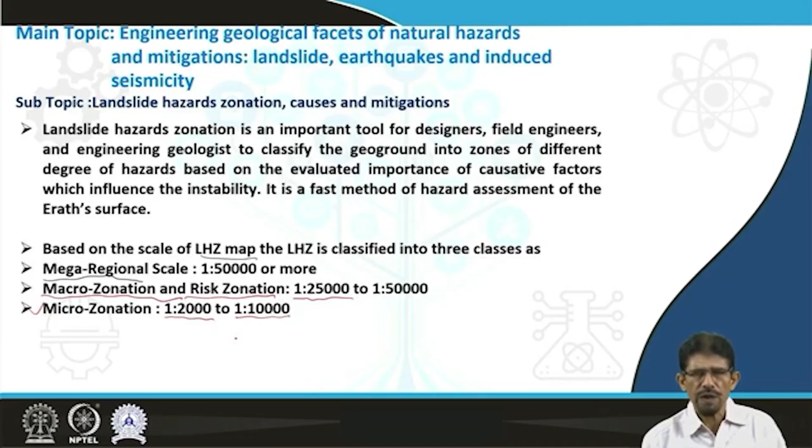The factors which influence formulation of landslide zonation are important, as these factors govern the phenomenon of landslide. The factors important for such formulation are lithology and structure. Structure deals with the relationship of the structural discontinuities with the slope face. Then slope morphometry and relative relief. The relative relief explains the height of slope. Then land use and land cover, and then groundwater condition.

If we look at each parameter, we can say that lithology consists of rock and land types made up of soil, debris and others. Overall, this lithology represents, in our discussion, the geoground. The geoground comprises a variety of materials, some intact, some in the form of rock mass, some weathered, some fully converted into soil. Considering lithology, we look at the overall distribution of lithology throughout a particular area. Suppose this is the area, then we map this area in view of the distribution of different lithologies.

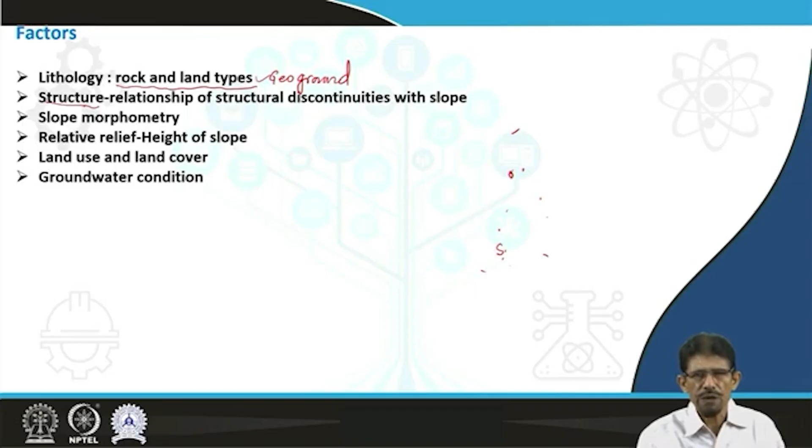Then about the structural or structure. Structure is about all kinds of discontinuities including fold, fault, foliation, lineation, schistosity, bedding planes, cracks, fractures, etc. How the cracks, fractures and others in form of structural discontinuity develop some relationship with slope, or what is the connection with the face of slope.

Suppose this is the face of slope, and suppose we are going to see about the distribution of the beddings, then what is the relation? We can define the relation with help of the angle of these beddings. The dip of these beddings is toward the downward slope side, where this face is having a particular phi 1 angle, where this bedding with respect to face is showing theta 1 angle, almost same, theta 1 dash angle, theta 1 double dash, theta 1 triple dash, where theta 1 dash, theta 1 double dash, triple dash are almost same.

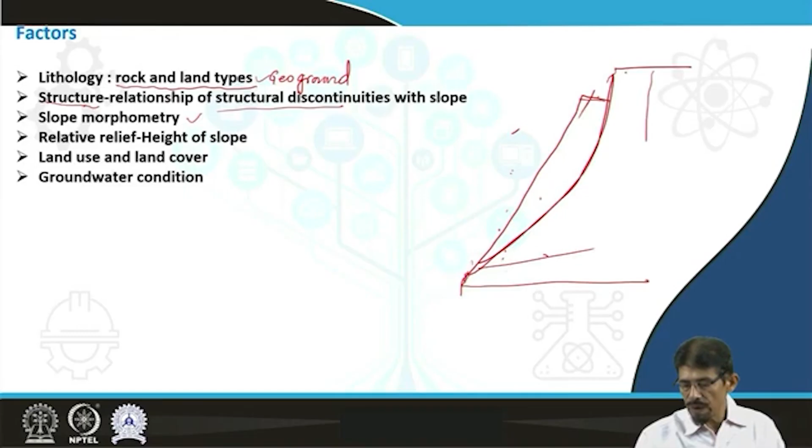In this way we are going to see about the role of structural discontinuity in triggering the landslide process or phenomena. Another important aspect is the slope morphometry. The slope morphometry is dealing with the features available in this slope, along with width, different cuts, the depression caused by some previously developed slides, the zonation related to loose material, solid materials and others, and the drainage system present or draining the slope, etc.

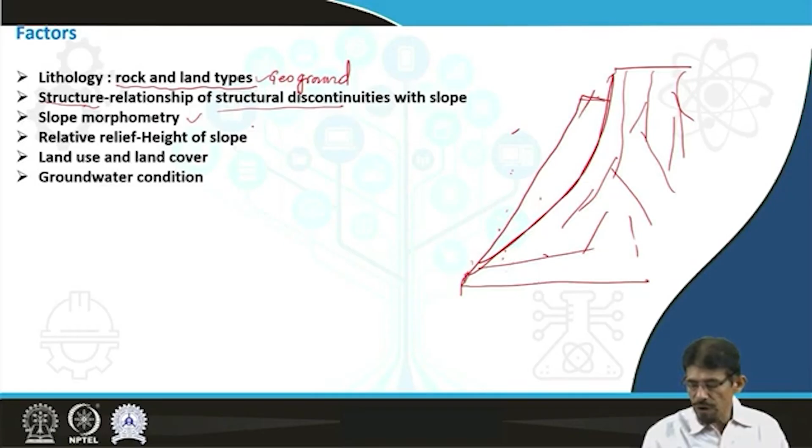Then we are going to see about the height of slope. The height of slope, this is the angle of slope. About the width of slope, we are going to measure in slope morphometry. Then particularly the height of slope we are going to define under the heading relative relief. This relative relief we can define by topographical view in terms of elevations with help of different contours and others, as well as physical measurement.

Land use and land cover indicates the parameter concerned to distribution of different landforms in the area of study, belonging to some river form, some weathered material, some aeolian form, some glacier form, etc. And then the part of the area covered under the forest, part of area covered under the vegetation, part of area under the shrub distributions and others, and some of the area is barren land.

So in this way we are going to assess the part of the area covered under forest, part covered under grasses, part under agricultural land, part barren, and part under residential zones. Such type of division is going to produce the features of the area in view of land use and land cover, because the forest, different types of plants, and different types of grasses are going to influence landslide occurrences.

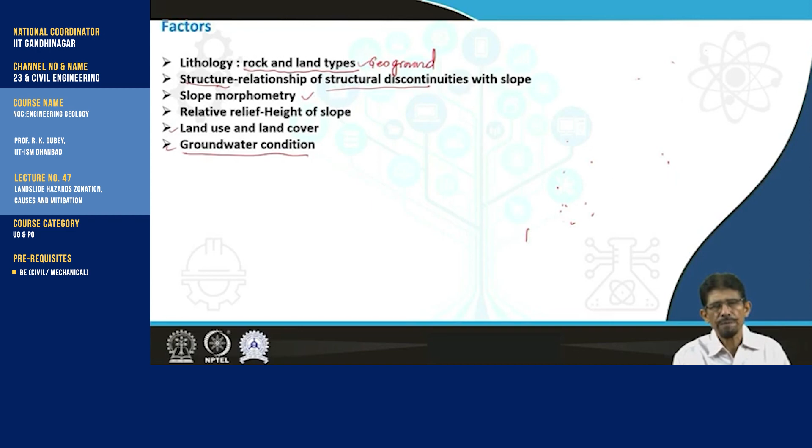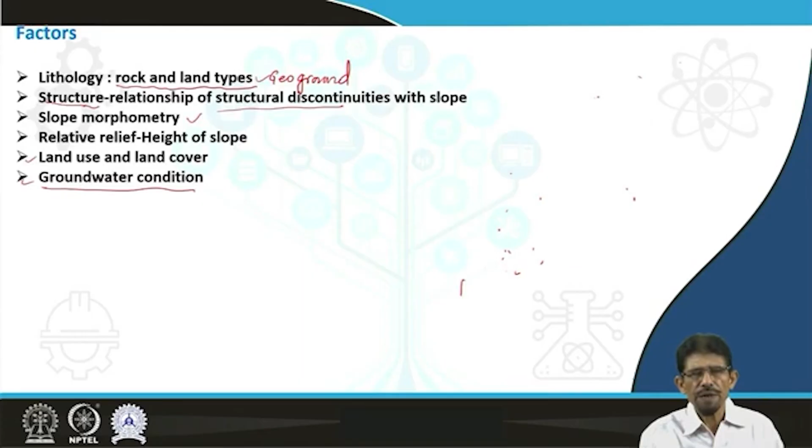Then an important aspect is the groundwater condition, and groundwater condition is very important. As we know, rocks as well as soil or any type of material under saturation is going to lose their strength. If there is a reduction in strength, there is more possibility for formation of a failure plane, and the mass lying above the failure plane is going to slide downwards under the influence of gravity easily in comparison to the dry condition. Therefore, the location of the water table is very important from stability point of view.

If we are going to see about landslide zonation approach, one of the landslide zonation approaches formulated by Gupta and Anbalagan in 1995 became popular for various types of use, as the system is simple, partially semi-quantitative and easy in adaptation by different communities, particularly geological communities, as the system incorporates parameters close to the geological perspective, theoretical in nature, and can be easily measured without any complications within a limited time span.

So they have proposed maximum landslide hazard evaluation factor, in short form LHEF rating, for different contributory factors which are going to influence the landslide phenomena. As we have already discussed, in landslide zonation we are going to cover lithology, structure, slope morphometry, relative relief, land use, land cover and groundwater. So they have arranged these parameters according to their importance, providing some maximum possible landslide hazard evaluation factor for each factor.

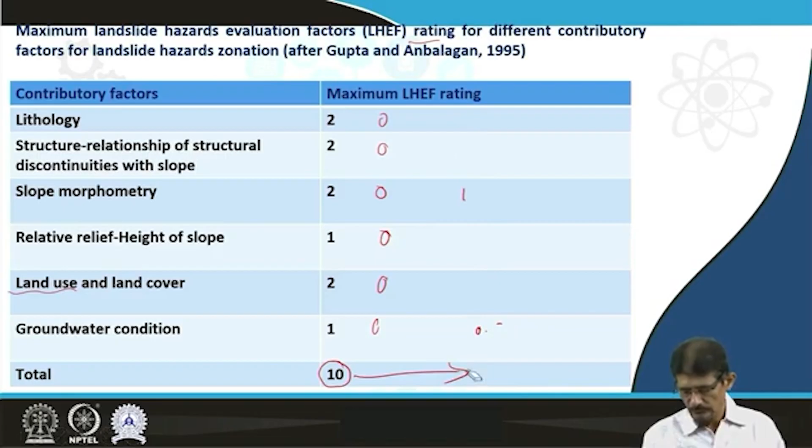In view of the calculated total evaluated hazard value, we categorize landslide hazards into 5 zones, from very low hazard up to very high hazard. If the total estimated hazard rating, out of a maximum of 10, is less than 3.5, the area falls under the very low hazard zone, VLH. VLH indicates the area is safe for development schemes, meaning people can construct roads, bridges, buildings and other engineering structures safely.

If the total evaluated hazard rating ranges between 3.5 and 5.0, the area is categorized as a low hazard zone, which is also suitable for development schemes like VLH: construction, development, expansion, resettlement work, etc. In the third zone, with values from 5.1 to 6.0, the area falls under the moderate hazard zone, MH, where we observe local vulnerable zones of instability. Some localized pockets are landslide zones that require proper treatment and mitigation measures.

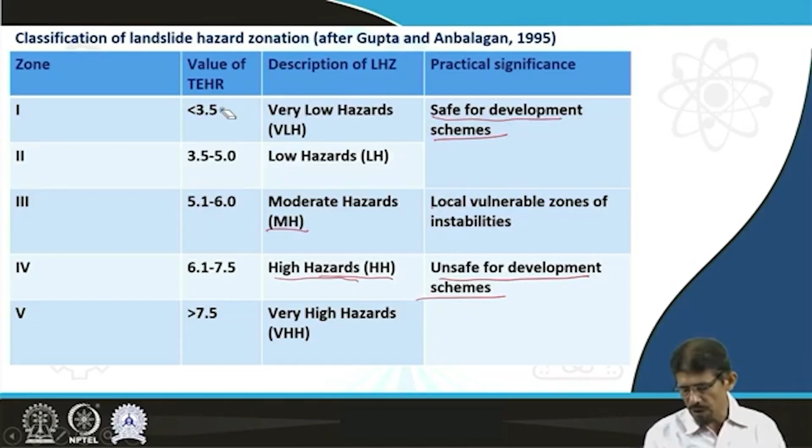Then 6.1 to 7.5 is the high hazard zone, HH, unsafe for development schemes. This area is not recommended for any expansion, construction or development program. When the value is more than 7.5, the area, similar to the previous one, is unsafe for development works.

Such results are presented in the form of maps, created through two types of work: laboratory and field-based work. Field-based data are processed under laboratory conditions, and then we show all the factors in a selected area on a map as different layers, as we do in ArcGIS.

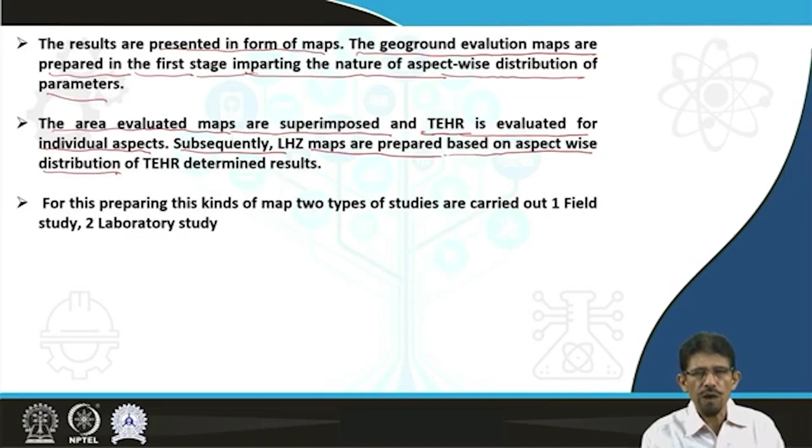The geoground evaluation maps are prepared in the first stage, imparting the nature of aspect-wise distribution of parameters, as we have already discussed, and the evaluated maps are superimposed, and the total evaluated hazard rating is evaluated for each individual aspect. Then subsequently the landslide hazard maps are prepared based on the aspect-wise distribution of total evaluated hazard rating

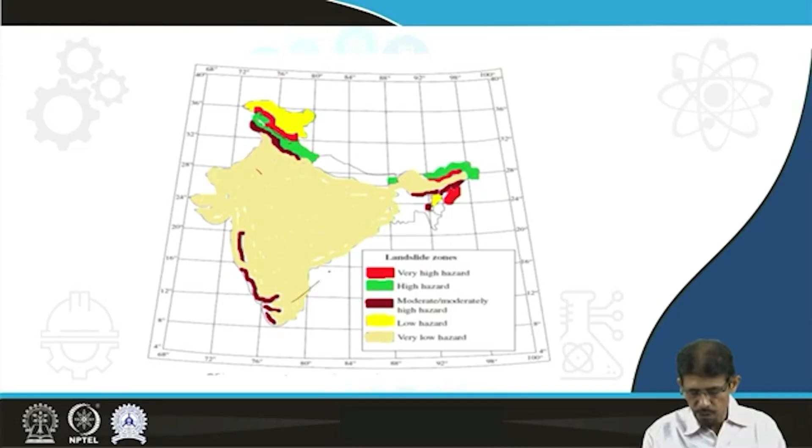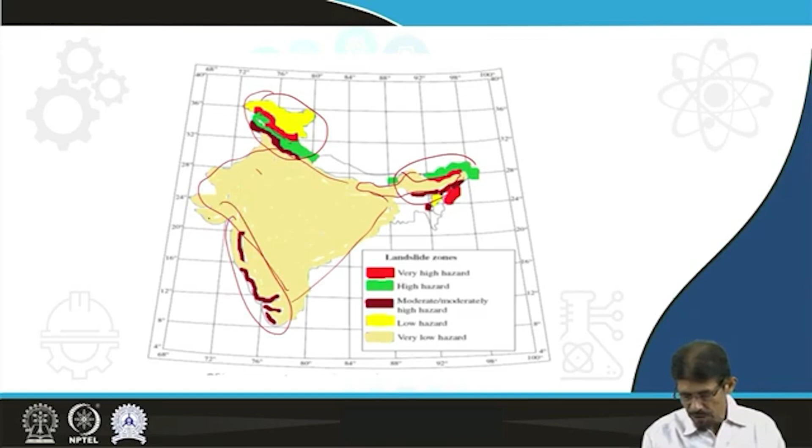determined results. You can see the distribution of different hazard zones throughout India: the very high hazard zones, then high hazard zones, moderately high hazard zones, low and very low hazard zones. The major part is under very low hazard zones, and some Himalayan parts as well as some mountainous regions fall under moderate and very high hazard zones.

As far as mitigation is concerned, we have some simple mitigation measures like slope modification with the help of excavating the vulnerable slope and filling up material to protect the slope. In this way we are going to reduce the slope which is going to affect the landslide hazards.

As we have already discussed, if a slope is saturated with water, then it is more prone to slide due to easy failure of the slope along a potential failure plane, and requires some dewatering. Therefore, we are going to put some perforated pipes to drain out water into a collector gallery and then release it, to make this zone unsaturated and reduce the landslide probability.

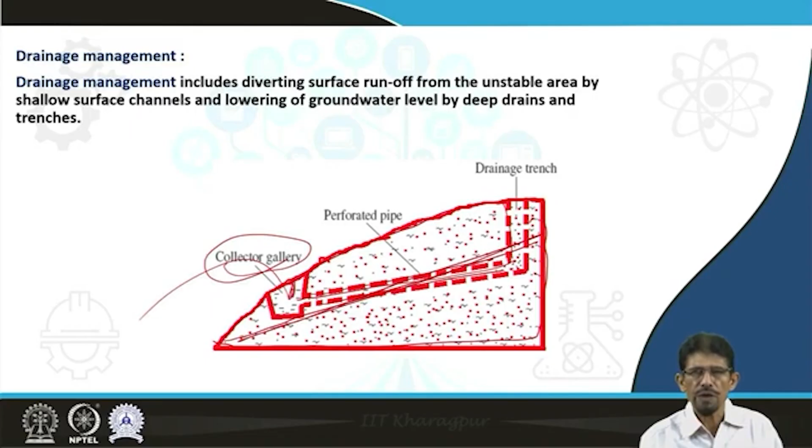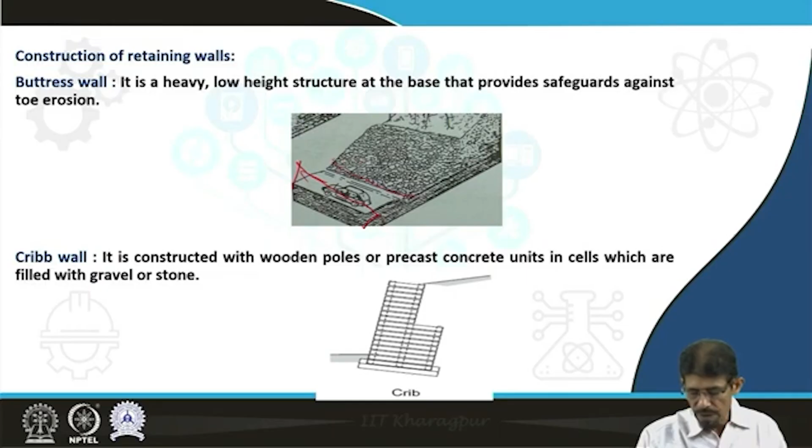Next, about the construction of retaining walls. In this way we are going to protect the road from the landslide. Here you can see the concrete walls we are going to put. Sometimes gabion structures, which are wire nets of steel wires filled with boulders, are also utilized to protect. Sometimes crib walls are constructed with the help of wooden poles or concrete units in cells, which also protect against the landslide problem.

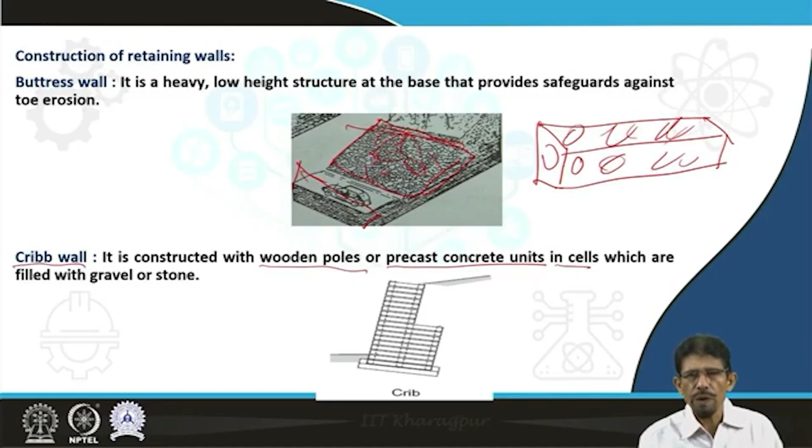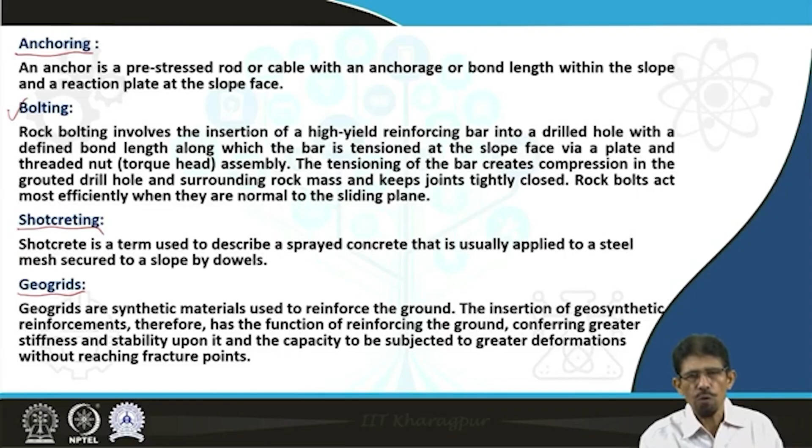Besides this, we have different anchoring methods using bolting perpendicular to the discontinuity plane, using shotcreting to stabilize the weak strata which are prone to slide, and then utilization of geogrids to protect the slope safely, economically and timely.

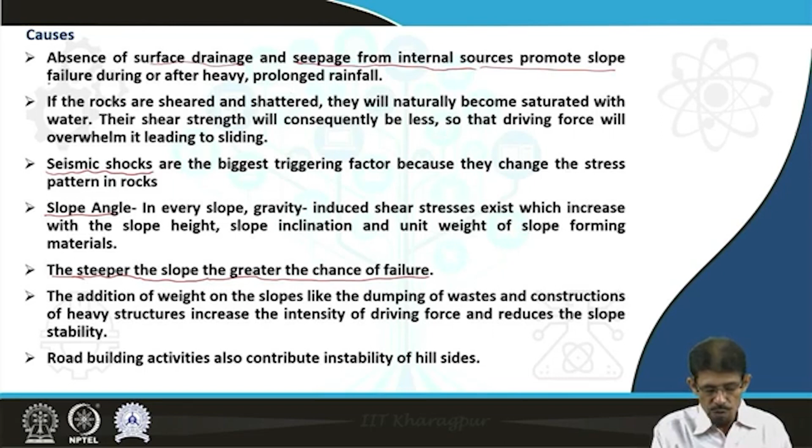As far as causes are concerned, the major cause behind the landslide is gravitational force, then water-induced forces due to heavy rainfall, supplemented by seismic shocks, slope angle, and slope morphology. The steeper the slope, the greater the chances of failure due to the enhanced effect of gravitational pull. Absence of surface drainage and seepage from internal sources promote slope failure during and after heavy and prolonged rainfall.

If the rocks are sheared and shattered, they will naturally become saturated with water and reduced in shear strength, and consequently lose strength and accelerate sliding. Seismic shocks are the biggest triggering factors because they change the stress pattern in rocks, and the slope angle is very important. The steeper slope is prone to slides, whereas the modified slope is going to show

minimum chances. The addition of weight on the slope, like mine waste dumps and other dumps, construction of buildings, construction of dams, or any weight on slid outcrops or weak zones, is going to accelerate the landslide problem. Road building activities also contribute to instability of hill slopes due to development of fractures and others, which change the geomechanical response of rock masses in comparison to the original situation.

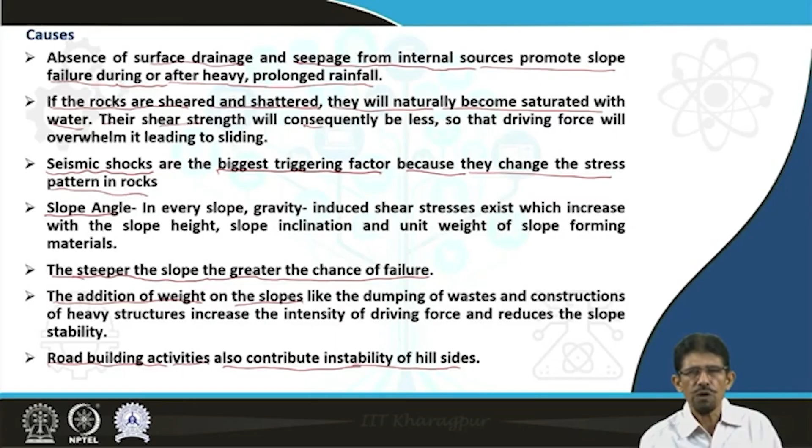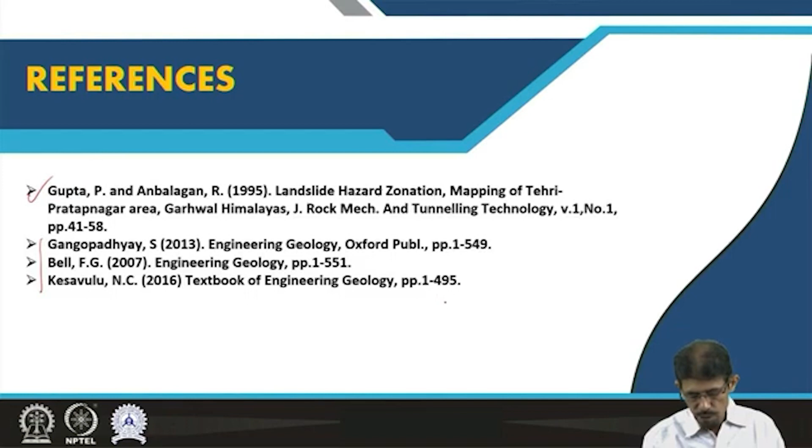Friends, this material I have prepared from the paper written by Gupta P. and Anbalagan R. in 1995 regarding landslide hazard zonation mapping of the Tehri Pratapnagar area, Garhwal Himalaya, published in the Journal of Rock Mechanics and Tunnelling Technology, volume 1, number 1, pages 41 to 58. Then partial support from these books: Gangopadhyay's Engineering Geology, the Engineering Geology book written by Bell F.G., and the textbook of Engineering Geology in 2016.

Friends, landslide hazard zonation is one of the important tools for demarcating landslides in view of their susceptibility to slide in terms of causative factors. Landslide hazards can be classified on the basis of scale as well as rating for different causative factors. Modification of the slope, dewatering of the slope, application of support systems, and geosynthetics are relevant to mitigate the landslide up to a certain limit.

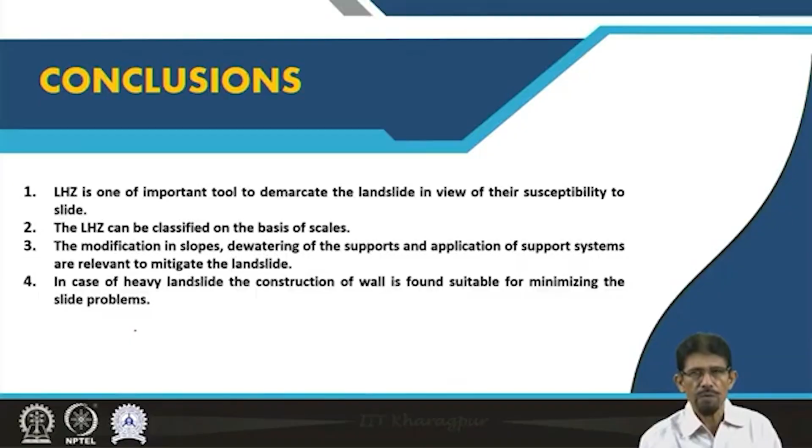And in case of heavy landslides, the construction of protecting walls, buttresses, crib walls, and gabions are found suitable for minimizing the slide problem. Dear friends, in this class we have elaborated on landslide zonation, mitigation, and causes behind the landslide.